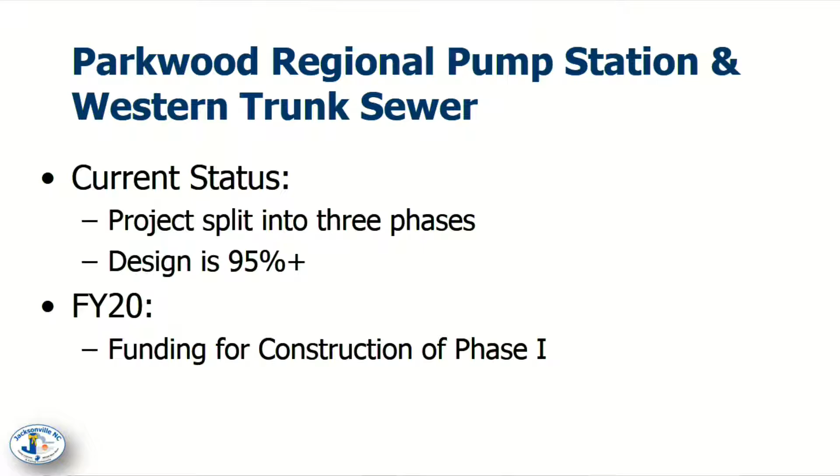This project, currently we're just over our 95% design. In 2018, the engineer decided that it would be best to split this into 3 phases. So what we will see in FY20 is the funding for the construction of phase 1. Going back to the Parkwood one, is this just bringing it to our current main lift pump station, not the new line across, or is this the new station and the new line across? Yes, ma'am. Okay, so this would be in the Williamsburg Plantation area that's going to go through.

Yes. So in our most recent model run, it's probably been 8 or 10 months now, Greg did an update on our wastewater collection system. The latest model run showed that we had slightly more capacity in that area of our system than the previous model had showed. So that's where we decided to split this project into 3 phases. The first phase would be an upgrade of an existing trunk sewer that runs generally between Williamsburg Plantation and Woodlands Park, along the creek that separates those neighborhoods. We wouldn't be constructing the station at this point, and all that will do is add capacity. It's smaller diameter lines, and we're going to have to do that section anyway, so there's an advantage of moving that piece forward first.

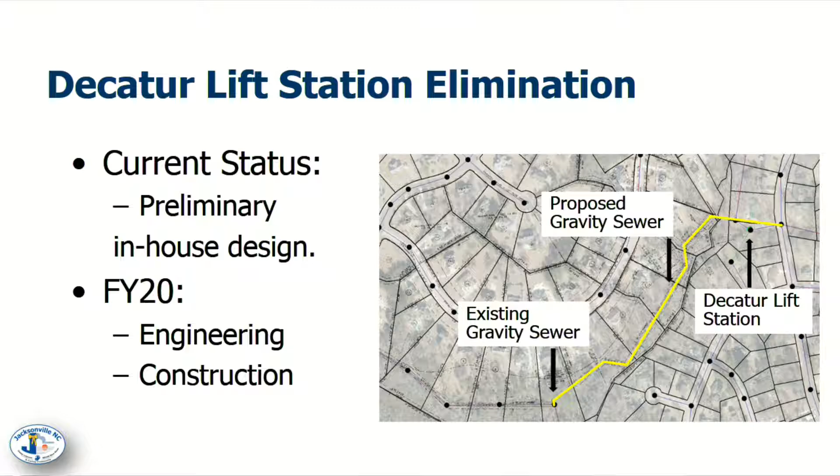And to add to that, the great thing about possibly being able to eliminate this station is, of course, that allows us to focus our ongoing maintenance and operations in other areas. So that is the one that always flooded, wasn't it? This one, it's actually a very shallow wet well that sits right beside a creek, and it's got suction lift pumps on it, which if they lose prime, you have to manually prime them to get it back running. And it's beside a creek that floods.

And we have, if I remember correctly, less than an hour of holding time in that station. So if something happens in the middle of the night, by the time we respond, we have just a few minutes to get the station up and running before we have an issue. And it's literally right beside the creek. Okay.

So all the easements and fun stuff obtained for that one? Not yet. The good thing is we will be using existing easements that the city already has. But I think we need a few connecting things, but right now we're doing survey work to ensure that it can flow by gravity to where we want to tie it in. And then that design will be done in-house by Talia.

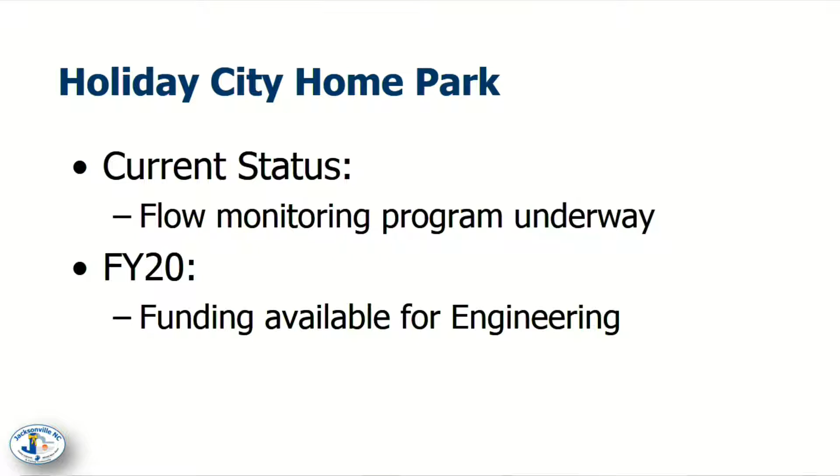The Holiday City Mobile Home Park. So right now, we have a program underway for flow monitoring. In 2020, we will have funds available for engineering, but depending upon the monitoring program, we'll ultimately decide which direction we end up going with that project.

And I know we've done updates on this a couple of times, but the peak factor that we see during a rain event is in the 20 range. So that means 20 times the amount of water in normal flow. We're working with the engineer for the park, I think we've already set flow meters, but the city also has some flow meters that we've set so that we can monitor our flow and they can monitor their flow, and we can try to identify problems.

Originally we looked at maybe it's possible to replace all of the infrastructure in the park and the park pay for it, and then we would take over maintenance long-term as an incentive. The estimate was in the $6 million range or so. So we determined that was not feasible, so we're looking at other alternatives. The problem we have is with the peak, the lift station's undersized. So we've either got to address the peak or we've got to address the lift station. Something is going to have to be done in the near future. But they're funding the engineering and the flow monitoring on their sections, and we're handling what's on ours.

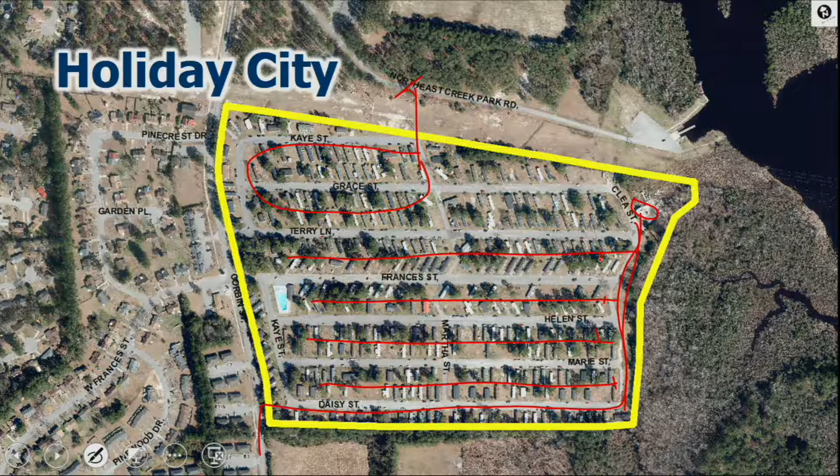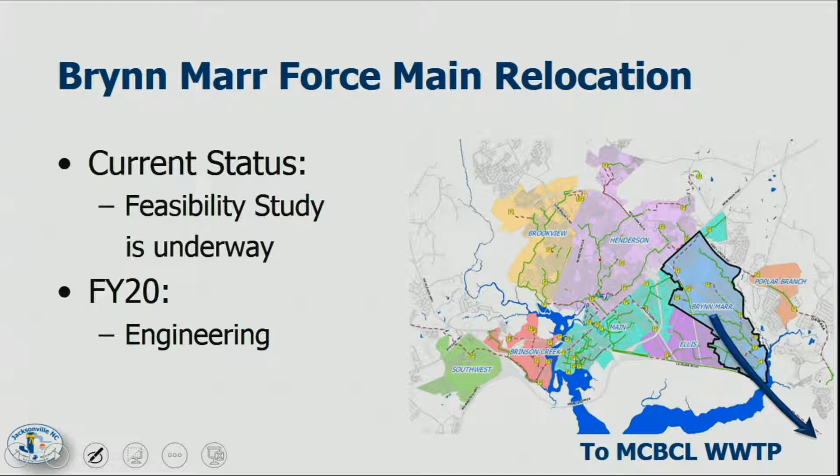I'm going to give council a brief update following on what Greg had started, talking about the wastewater collection system and treatment. I'm going to follow along in that series at the end of this month with city council. So if you're available on the 22nd, feel free to come out and hear the next round.

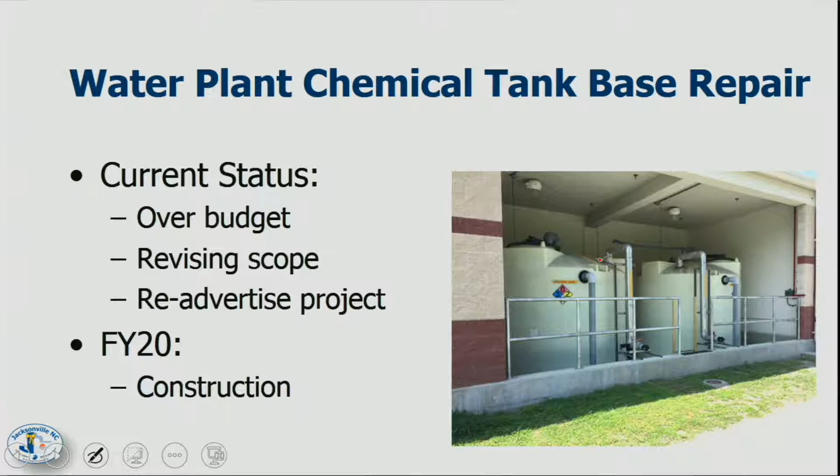Our water plant chemical tank base repair, this came in over budget. So our engineer is revising the scope by changing some of the materials for an add deduct, change minor things. The overall scope of the project is staying the same, and we will re-advertise this project. So in the coming fiscal year, we do plan to see construction occur. I thought that had been done. It's not complete. It was almost double the budget? Yes. We bid it, it was just almost double the budget.

Oh, wow, okay. And some of the issues was that we had asked the general contractor to deal with the sulfuric acid, but we've taken that responsibility off of them, so we're hoping that will ease a few minds and give them more time to understand the project. How bad is the deterioration of the concrete getting? I mean, it's certainly working on it, and it's something we're going to have to address. It's not an emergency that we've got to fix tomorrow, but it's certainly starting to work on the concrete.

Are you planning on replacing it with the same thing that's there now, or is there some way to do this better? No, they're looking at a coating that would be chemical resistant. Okay. So are they going to get rid of the bad concrete and put good concrete and then coat it? I'm assuming there's probably some sort of leveling course. I didn't get into the design of the project, but it would make sense that they would put some sort of cap or grout down and then put a coating down.

And I think part of the project also deals with, we have always had priming issues. It is this one, right? When the chemical gets low, the level is actually below where we're pumping from, so it creates issues with feeding the pumps. So this project would also address some of those issues. Yes, sir, it's raising those a bit, as they're below grade. It's a constant battle to get it uphill to the pumps. We have to keep repriming. So, yeah, they need to be raised a little bit too. Okay.

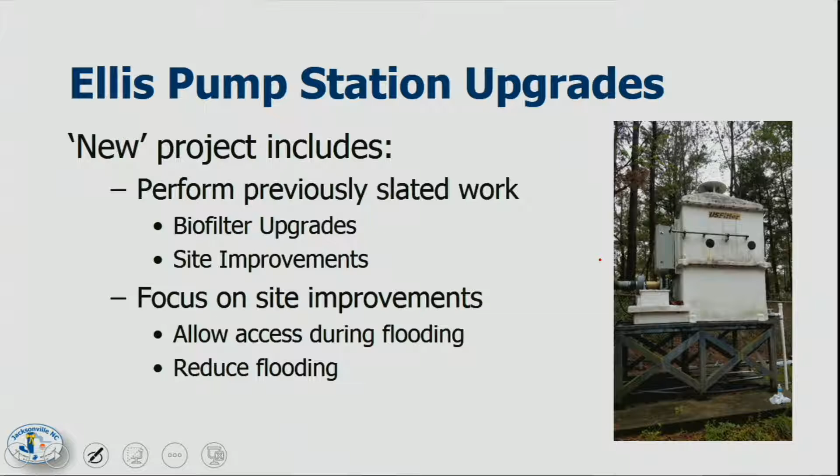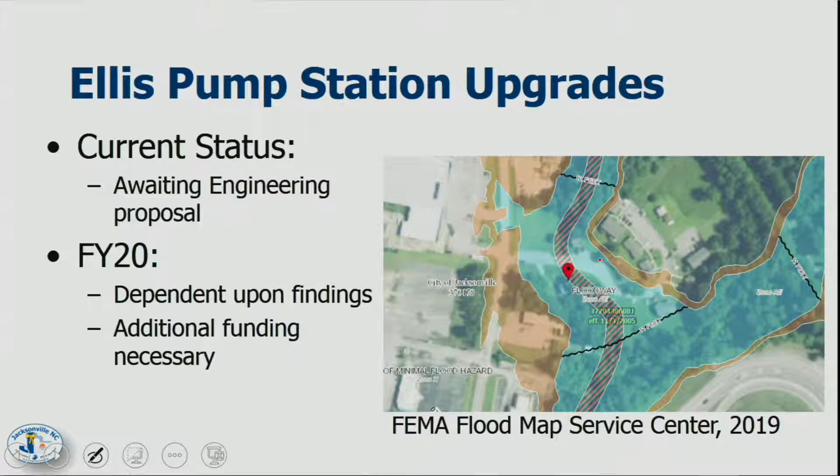So again, the current status, we are waiting for a proposal from the engineer, and dependent upon those findings, we will adjust FY20 for what we see. And additional funding, we do foresee having to increase this. Can we go back? One more. During the storm, the water was at least at that level. It was 2 to 3 feet inside the building, and we did have damage to some of our control cabinets.

And we recognize the FY14 site work project. I know, and I can anticipate the question of why do we have a project hanging around from FY14. The original scope of that project was to literally build a berm right around the station such that we kept the station from flooding. Well, due to the floodway and the floodplain, we found it wasn't even permitted. We wouldn't be permitted to do that.

So we recognize the importance, and of course Florence highlighted that, of figuring out how to deal with this station. And we've looked at everything from relocating the station to waterproofing. So we're trying to figure out what the best course of action will be. So that's why we've combined that project. And then the biofilter was literally for this component over here. And I think you'll remember we had conversations about this before.

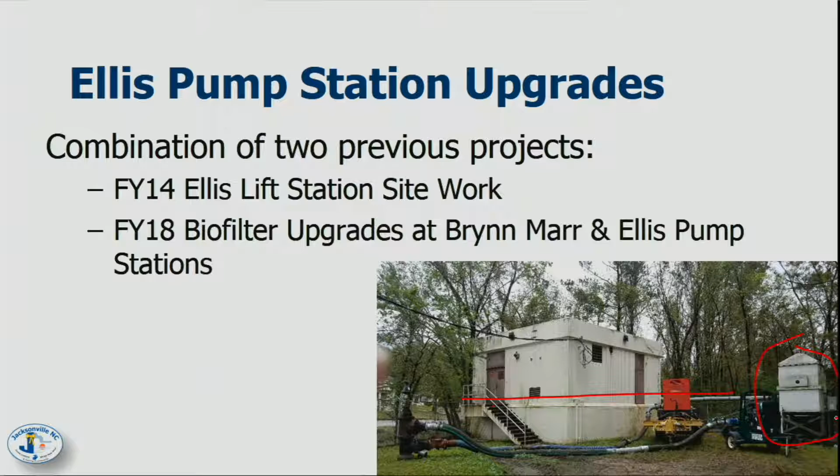I know you've got in here that you had to use a small boat to get around to some of these. We have, and we've used the small boat when water didn't get in the station. But in this event, water was 2-3 feet inside the station. But you need one to get up at times if it was flooded bad enough up to where the door is at there? Yeah. Oh, yes. And we've talked about, as part of the FY14 project, building a boardwalk from that higher elevation into the station.

Would access be better through the roof? Yeah, actually, we have talked about making the station watertight and then putting a roof access in. The challenge with that is it actually becomes a confined space. So we have to deal with different access regulations. And there's no way in an event like Florence we would put anybody in a confined space like that. So we would just let the station go anyway. So we'll be back in front of you with this project in the future.

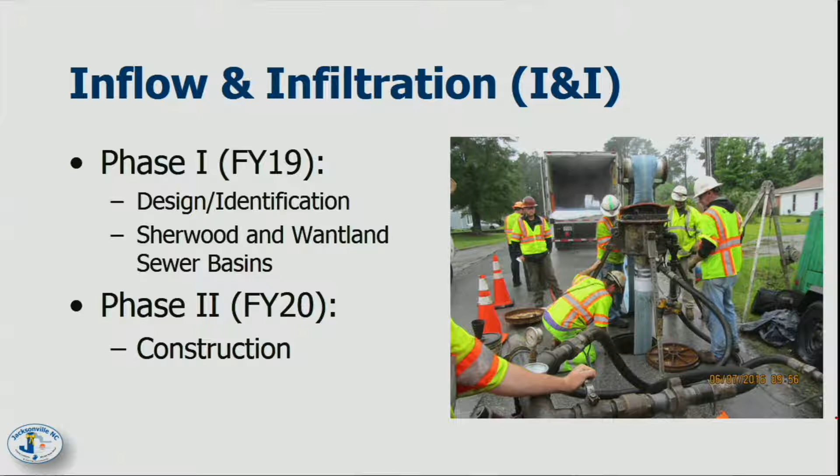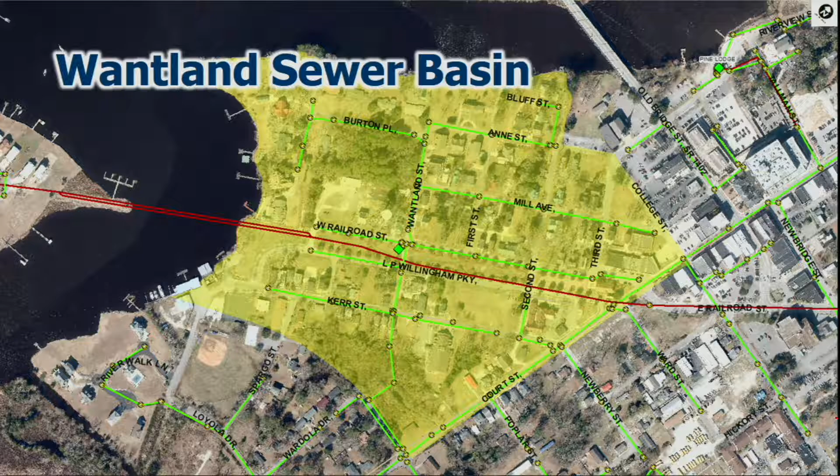So our I&I, our Inflow and Infiltration, this is a recurring project that we have every 2 years. The first year is our design and identification. Our second year, which will be FY20 for us, is the construction. And the two areas we've identified are Sherwood and Wantland sewer basins. So here is our Wantland area. This is in the downtown area, right near the river, obviously. And then our Sherwood. This is over kind of behind Dunkin' Donuts on 17.

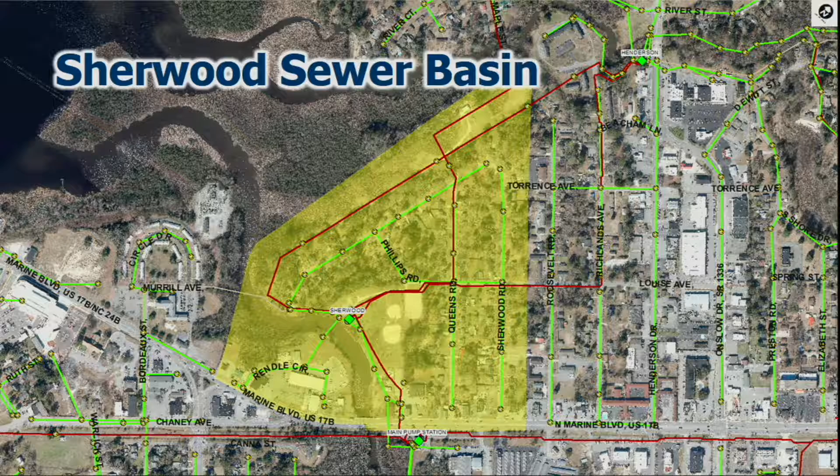Next is our water plant maintenance bridge. So the purpose of this bridge is to access the top of the trains, access the fans and electrical equipment, and not just a one-time thing, but ongoing maintenance. So we have had some issues with the fans not working, which does create further problems in there, which we will see, especially as the humidity does increase when we get more into the spring, summer.

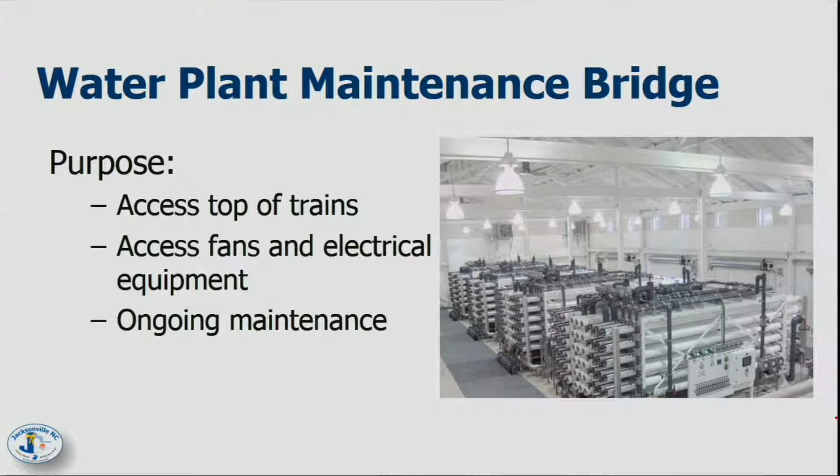And now when we discuss our wells and our well houses, I'm gonna pass it back to Wally, he's been working with all of these. I'm going to take a sidebar for just a moment to talk about something we've talked about several times. We've talked multiple times about the Black Creek Aquifer and the withdrawal reductions that the city has faced. Not just the city, the other water purveyors that pull from the Black Creek Aquifer. Where we stand right now is, as of August 1st, 2018, the city has taken a 75% reduction. So originally we were permitted for roughly 4 million gallons per day. So currently we're permitted to withdraw 1 million gallons per day.

The state came out actually right at 2 years ago and said, we will issue temporary permits, temporary meaning that at any point you violate one of these criteria, we can take it away from you. So while I say temporary, it doesn't mean it's only good for a certain period of time. What that means is it's good until you start violating one of these criteria. And then they delineated 3 criteria, and those are static water levels are increasing, chloride levels are not trending upward. That means the aquifer is not getting saltier. And then pumping levels are above the top of the aquifer.

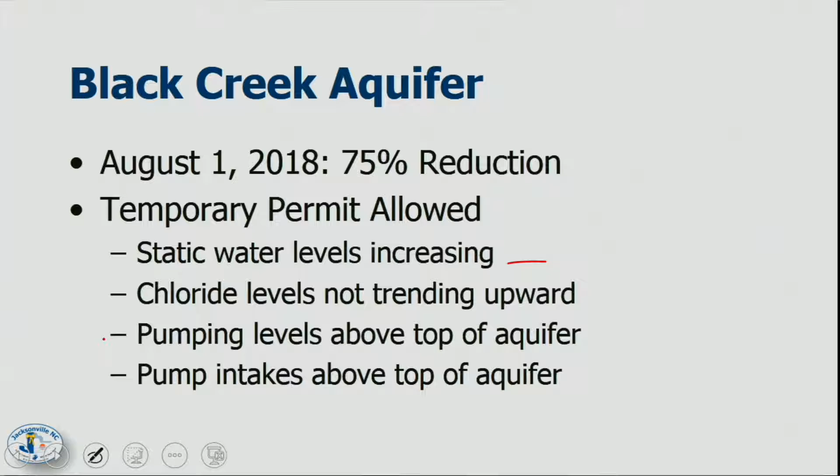The challenge we're currently facing is finding documents from the 60s that show what our pump intake levels are. We have levels on file, but we don't know where those came from. They're just keyed in. So the state needs to see actual records of where our pump intakes are set. So that's what Joe is currently working on now, trying to come up with, for our 12 Black Creek wells, what our pump intake levels are set at.

Is there a thought of sending a camera down? Well, there is, but to do that, you have to pull the pumps. So it is not a cheap thing to do. So we're trying to find all that we can find records on. And then we'll figure out whether or not we have to pull the rest of them. And we may. And there's some that we're probably going to pull and camera anyway, because there's a couple that we have varying results over time.

And Dr. Sproul is very quick to look at that data and tell us, in his opinion, especially for one of our wells, he thinks it's a well construction issue from the date it was constructed. And the well log actually shows that the well was over drilled and then abandoned to a certain level, which would support his thought that it's a well construction problem. And that's why we're getting varying reads when we go to that well.

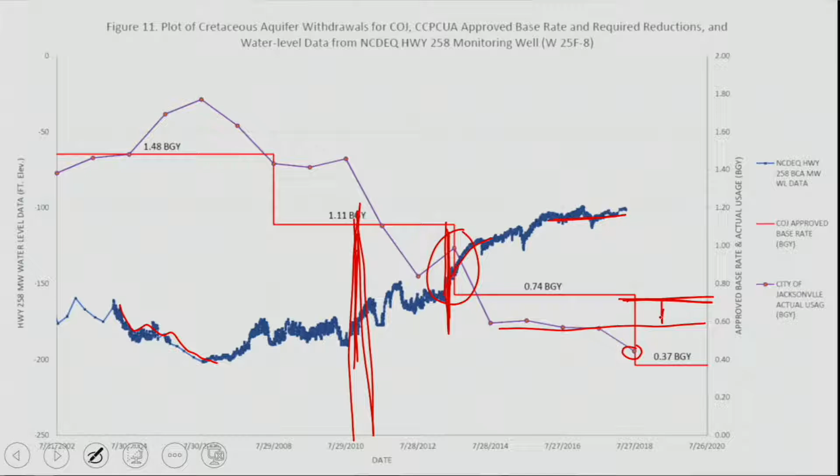So we don't want to lose that extra 1 million gallons per day because as we start to grow, going back, the difference between operating somewhere in this level and here, we can increase our demand. We can grow some and not have to go pull more out of the Castle Hayne. So it gives us flexibility to operate. And in addition, some of these, and I'll go back to this, you see we're operating kind of here.

This spot right here correlates, if you'll remember, we had an issue at the water plant. We had to take the water plant completely offline for several months to replace one of the pipes inside the water plant. It was actually the bypass line. And that's the Castle Hayne water.

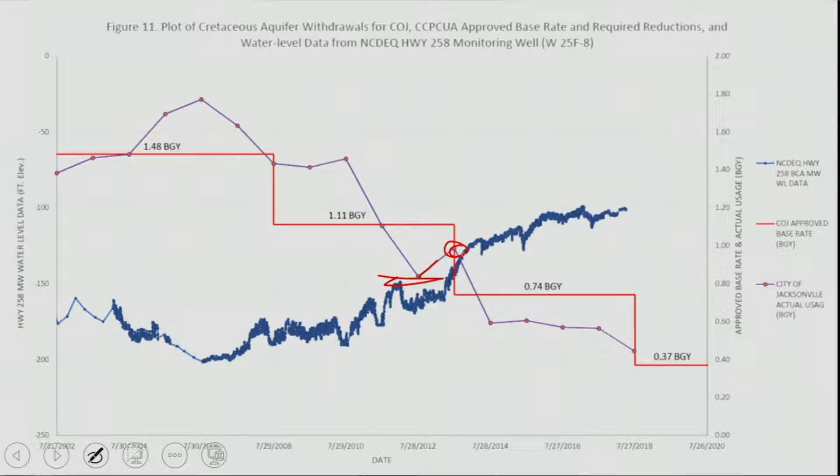So what happened is we're not pulling from the Castle Hayne during that period. So obviously our usage from the Black Creek went up because we still had demand. So it gives us flexibility should we have to take our plant offline for a period of time for operation or maintenance. It just gives us greater flexibility. It gives us room to deal with growth.

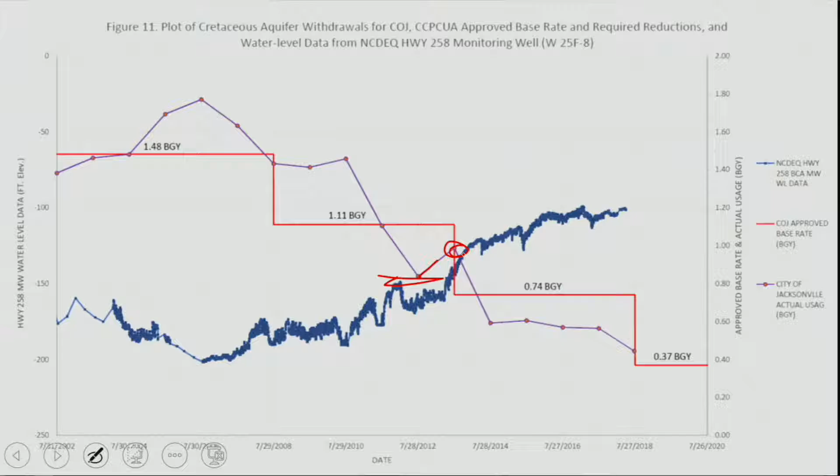So we want to make sure that we try to get the higher permit, not just because it's cheaper, but it also gives us greater flexibility. The wells that went offline because of the accident, are they expected to come back on anytime soon? We're gonna talk about that in just a minute.

That's a great question. Well, I think it's important though for the audience that's watching to understand that with all this hydrology and geekness that we've been talking about, that getting that extra million back will keep the pressure off of rates going up, which for a lot of people, they might not appreciate all the other things that we're talking about, but they do appreciate you saving them money on their water.

That is true. The real big one, sorry, Wally, is when we're operating right now with that amount, we have dropped so much in the customer concerns because the blend is so good. And if we have to change it, it's basically starting from scratch and going back to find the good blend that works for the customers. But this blend that we have now with this amount of water has probably dropped those 60%.

And on the other hand, if you get permitted at that 50% at 2 million gallon level instead of 1 million gallon, that would be even sweeter. Yes, sir. Sweeter water. That's right.

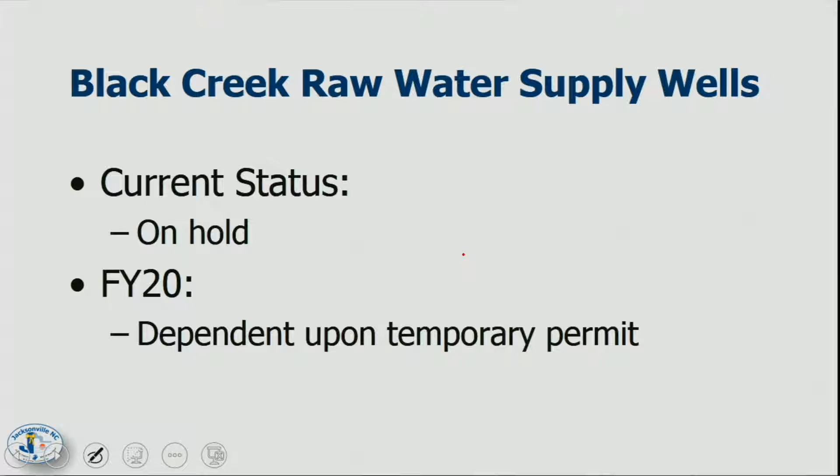And then we've got 3 projects in the CIP. 2 of them are new and 1 is a rollover. So we have the Black Creek raw water supply wells that was on hold. So I guess it's not technically new, we just hadn't started on it. And it was dependent upon the temporary permit, but this is actually constructing new Black Creek wells. And then we have the one that you just asked about.

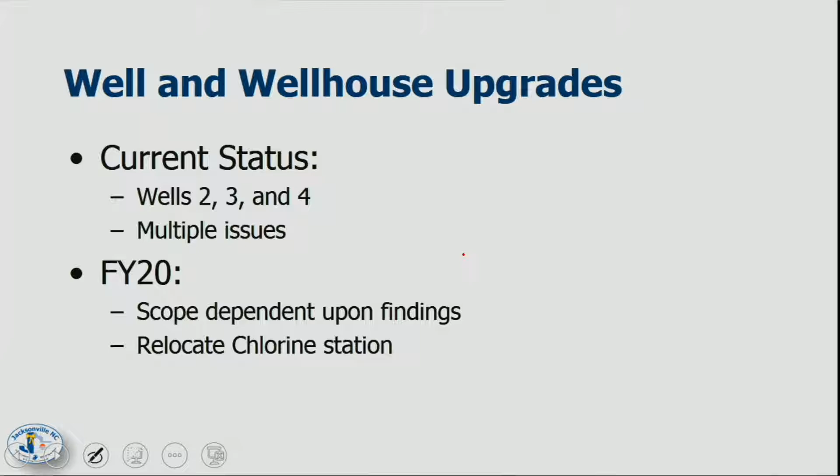Wells 1 through 5 are what went through the chlorine station. We also had a project because those wells were built in the 60s and the well houses are at the end of their life, and the electrical components inside, everything. So we had a project to actually rehab wells 2, 3, and 4.

Well, as we got into it, what we realized is that we had a lot larger issues there than we knew about. And before we spent a bunch of money rehabbing well houses and upgrading electrical equipment, we thought it would be a good idea to camera those wells. And I have the results, and I'll just read you a summary of them.

Well 2 is currently unusable because the camera couldn't pass the 268-foot mark. There's sediment or a pump or a failure that blocks anything below 268 feet. And if you remember, the Black Creek Aquifer is somewhere in the 400 to 600 foot range. So well 3 is questionable for rehab.

And the reason is there's numerous holes in joints, there's bad joints, and there's an issue that occurred during construction that has continued to fail, obviously, since the 60s. And at some point, we don't know when because it predates both Joe and I, they tried to reline that original well. So they tried to reline it once, so it's not like we could go in there and try to reline it again.

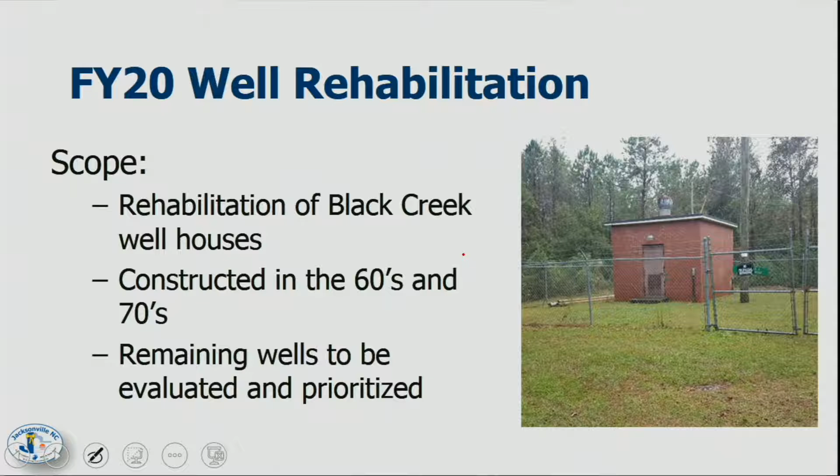But now we've got three projects all dealing with Black Creek wells, not necessarily in the same area, but does it make sense given what we're trying to do with the temporary permit to keep 3 separate projects, or should we consider modifying and making 1 project or 2 projects? And as a staff, we kind of sat down and talked about that. So here's the summary.

So here's kind of what staff thinks we should do, and we thought this might be a good discussion for the board: we think that we probably should combine the Black Creek drilling new wells and rehabbing 2, 3, and 4. Because what we're finding is those aren't great candidates to reuse that well. So you just said rehab them.

Jointly, we meet with ONWASA as part of the Water Resources Group. And what they shared with us is they actually were doing work at their well 8, and it failed completely. It actually collapsed inside, so they lost the well completely. They had to abandon it. Is that a similar age to ours? It is. Yeah, and you just said rehab, and I thought you couldn't rehab them. Well, it says it's not a likely candidate. So,

they said it was actually very easy, and the state willingly gave them a permit to relocate that well to a new site. They're moving it to the Union Chapel area. And it moves it a little bit further out of where the cluster of wells in the Black Creek are, so it spreads the use of the aquifer out a little bit more. But they said the permitting was very easy and the state looked favorably on that because they were relocating.